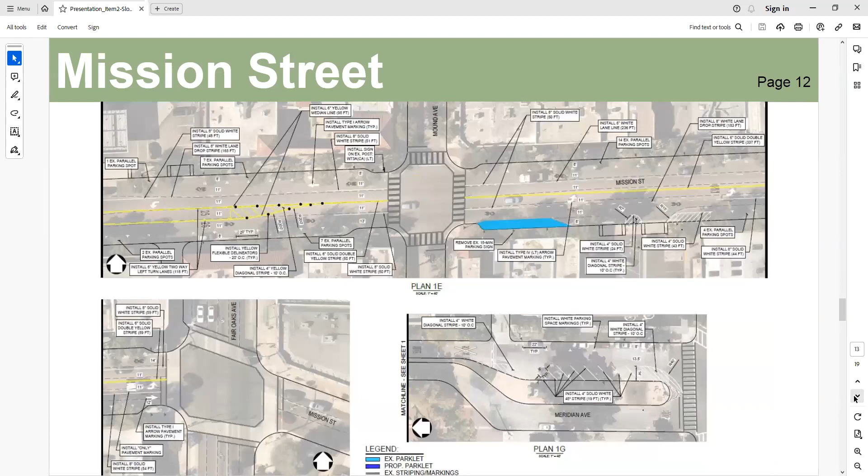Okay, we can shoot to the last page. Hopefully it's simple because there's not much on there. Let's go to page 12. So this is the termination of the setup on Mission Street. And at the bottom there, we have the little section of Meridian where parking has been added instead of the wide northbound lane on Meridian. Any comments on that?

Can you explain the parking on Meridian Avenue? Looks like your diagonals are backwards, unless you wanted back-in parking. Yeah, I think that was an error. I think it's probably the orientation of the drawing that caused that, but thank you for adding that. Are there spaces there now? There are spaces there, yeah, parallel spaces. So it's just increasing the parking.

Got it, basically. But the one thing I'd like to point out is if you are westbound on Mission and you're east of the intersection, there's only one through lane. And as you proceed westbound to the other side of the intersection, there's suddenly two lanes. So you could stripe one westbound lane west of Fair Oaks and not have to drop a lane, because there's only one lane feeding it. So there's one westbound lane feeding the far side of the intersection - you don't have to create two lanes only to have to drop it. You just keep it one lane. That'd be a way of reducing.

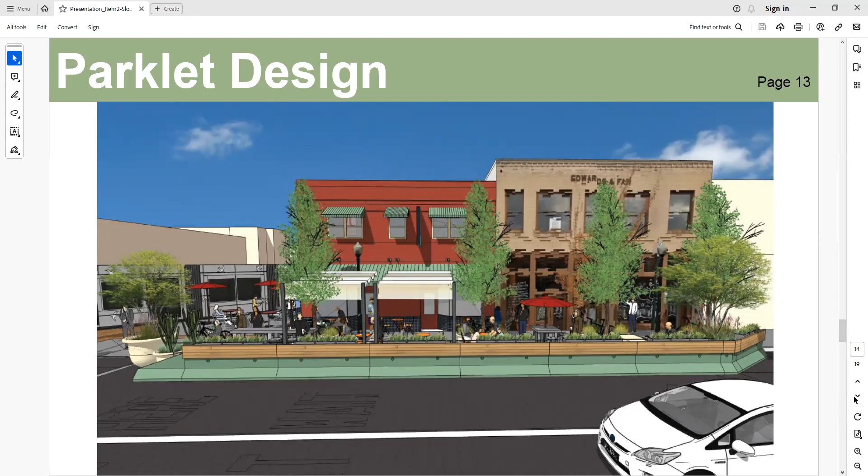If you jump to the next slide, you can see it on the angle there, and that's where we would utilize some of the planters outside of the K-rails on the leading edge of the traffic. The K-rail planters don't have any functional use, they're completely decorative. If you go to the next slide, you can see on the leading edge there's planters that can be inside the K-rails.

Because this leading edge basically creates a triangular gap inside the parklet with the flooring, since all the flooring we've purchased is rectangular, the design consultant, one of the sub-consultants of Alta, the Arroyo Group, was proposing that we install some sort of planters inside that area to take up the space so people won't step off into that area.

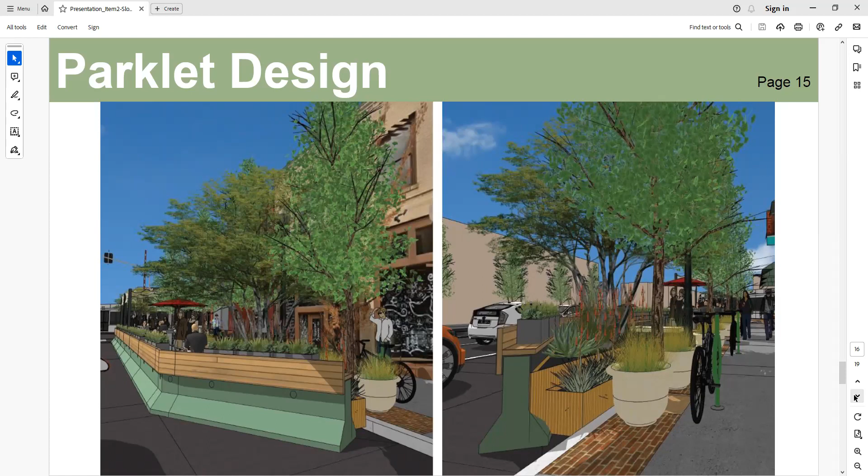Go to the next slide. I think you might be able to see. Yeah, this is a zoom in of one of the potential tops to the K-rails. In the last picture we had planter boxes, but this one is just a fabricated wood facade on top. You'd see there's railings inside the K-rail along the parklet, so that keeps people from stepping into that small gap between the parklet flooring and the K-rail.

Generally, the parklet flooring is continuous, has a railing around it, and inside that is the business owner's space. We would provide guidelines as to what they can do with it and the type and style of furniture they can use. But outside of that, the K-rails, the K-rail facade, the parklet flooring, the railings, and the planters would be the city's installation and responsibility. There might be one more.

Nope, that's it. So the K-rails, are we purchasing those or are they rented? The ones we have are rented. It would probably make economical sense to purchase these next round.

So next step, with regard to the residential section, continuing the survey responses, reviewing them again at 3 months. This Thursday, discussing the parklet design with cultural heritage, working with the businesses on the parklet implementation, because that'll come first. We won't deploy the road diet and the parklet at the same time. We'll do the parklets now, which is what we're working on. Based on your comments tonight, we'll refine the Mission Street configuration and propose different modeling scenarios that we'll want to run. We may want to reconfigure it based on our discussion tonight, and then we'll be back here for the next step. Any other questions on slow streets?

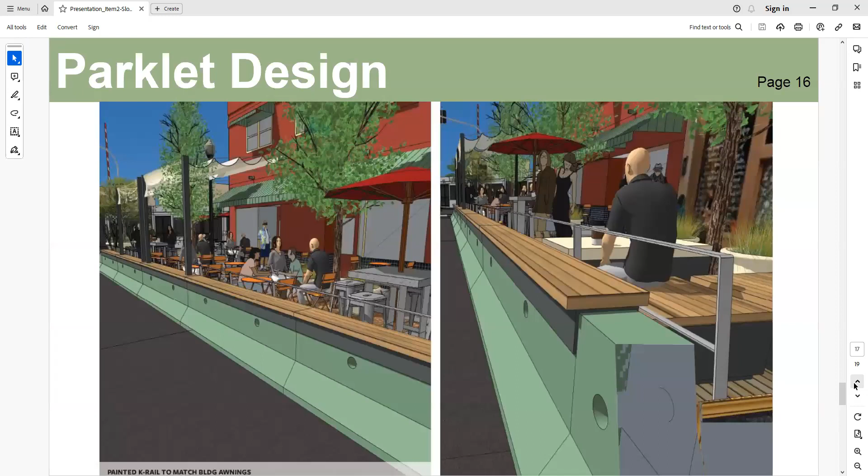Yeah, could we go back to one of the sketches? That's good. Just one suggestion: let's not have the large pot at the crosswalk, you won't be able to see a child should one run out. Sure. I'll just preface by saying that our consultant who did this rendering was not looking at the street space in any way. They were focusing on the building and the parklet, so it might not even be accurate where that's located.

Okay, but also I want to ask a question. You gave us a schedule like Commissioner Avison. I don't want to go round and round too many times. I'd like to suggest something that I think is feasible, and then the consultant has some direction if you would agree it is feasible.

That would be, let's simplify the operation. No development of lanes and then dropping of lanes, and suddenly you're in a trap left turn lane or a right turn lane. I suggest that from Fair Oaks to a point east of Orange Grove, the physical center 10 feet be used for left turn channelization, whether it's a conventional pocket, a two-way left turn lane, or something reserved for a median. The center 10 feet would be left turn channelization, continuous throughout the project. Next to that 10-foot strip on either side would be 10-foot through lanes, one eastbound, one westbound.

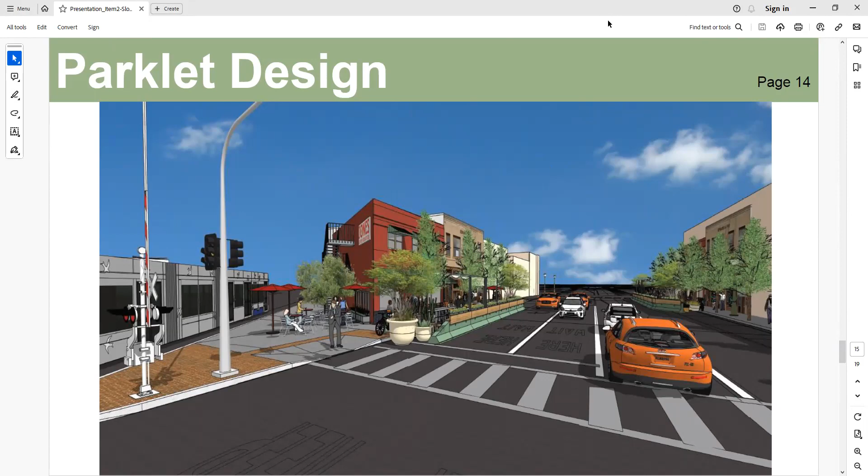I do want to make one comment. This is a routine item. We do have direction to change how we're handling minutes, and so all commissions are standardizing on a different action-based format. It was an email that the city manager's office sent out, so please take a look at it. The breadth of the minutes will be reduced to simply one-line items and action items.

Number one, not on the ones we're approving tonight, but starting next month. And number two, we've been given direction that discussion of alterations to the minutes should occur during the commission meeting, which would probably prevent us from circulating the minutes ahead of time. This is new, but I want to prepare the commission for that. Would it be appropriate for you to still circulate the minutes between two commission members?

We might be able to do that. Let me find out. Okay, I missed something, and it may be because of the hour. I understand the simplified format, makes perfect sense. I don't understand why they wouldn't be distributed ahead of time.

I think the idea is that if there's going to be a discussion about the change to the minutes, that discussion would have to happen in a public atmosphere. Oh, so they would still be part of the agenda packet? Right, it would just take it from offline to online. Got it. Basically, yeah, no problem.

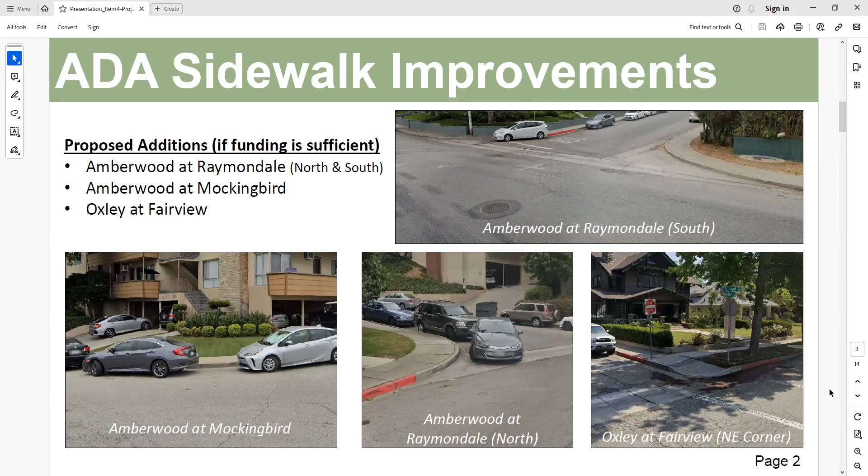Thanks, Ed. So the next couple of slides you've seen before—these are all repeats from our State of Streets meeting. I want to bring this up and shoot through them quickly since you're familiar with them. We wanted to give you the initial view, no discussion needed, of the areas we divided up for our future street program. We talked about dividing the city into sections, not for the current project sets, but for future project sets. So this is the 2020 pavement condition index.

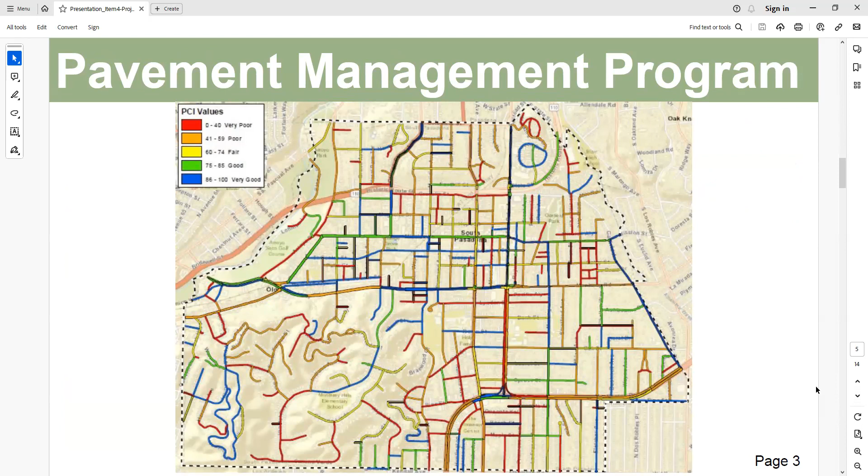You've seen this before—you can jump to the next one, Liana. During our State of Streets, we talked about funding levels, how much you're going to put in each year. Jump to the next one, Liana—sorry, I'm going to jump quickly. We talked about all the elements that go into planning your street construction: considering utility improvements, arterial versus residential, and what funding you have.

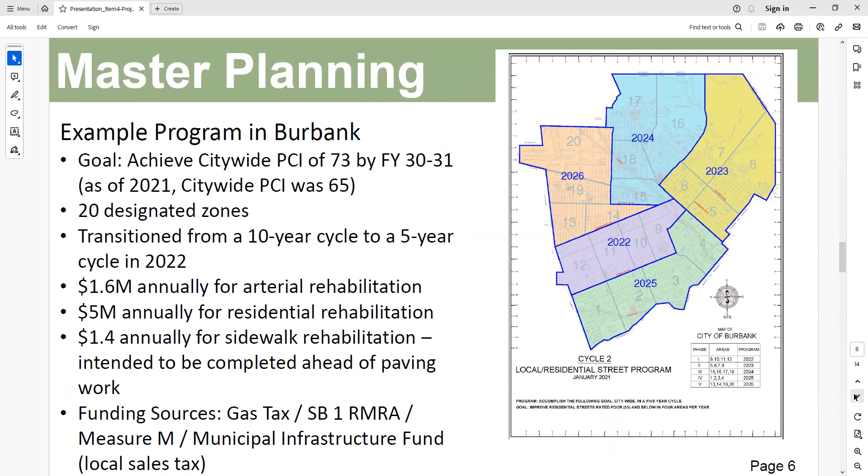Development projects, things like that. Let's jump to the next one. This was Burbank's plan, if you recall from our session a few months ago. Let's go to the next slide. We still have sewer repairs. Next slide is water repairs and fire repairs. Let's go to the next slide.

Okay, so here we are. So this is two things. There was a request from the commission. Let's actually jump one more slide, let's just jump past this. It's almost the same, but it adds in some more lines.

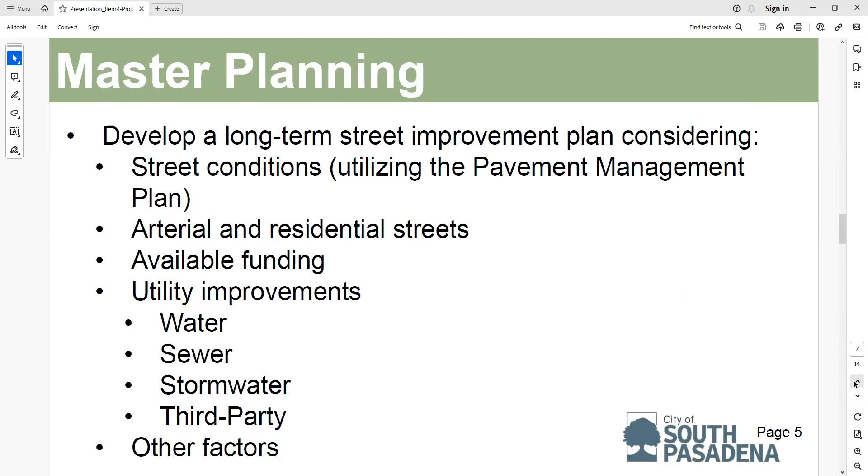Yeah, so this is under the 2020 plan. This is like, if you're gonna spend 3.5 million a year, or 3 million a year, or 2.3 million a year, this is how long it takes. But this doesn't include utility replacements that are required, water, sewer. It's a good model, but there's a lot of other factors to consider. It doesn't really consider concrete work.

Ted, do you plan on bringing this back to the commission? Absolutely, yeah. This is just an initial preview for you to take a look at. So please take a look at the map and come up with your questions. We'll revisit this. Okay.

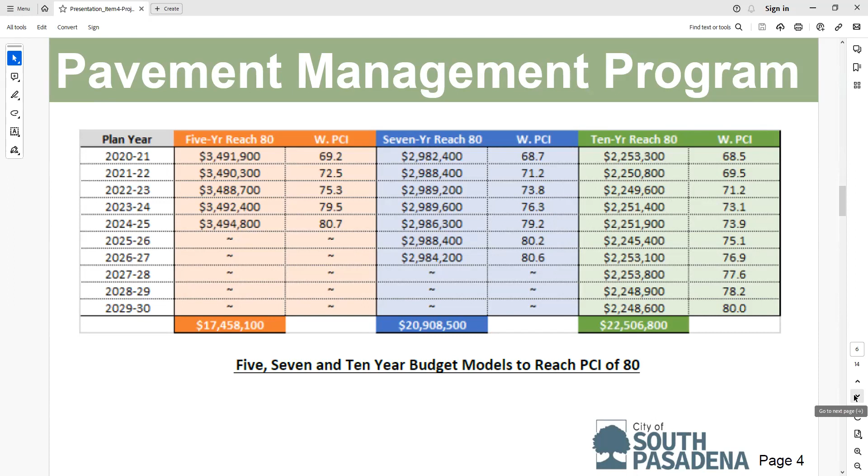I think that's it. All right, so any question on the project status?

Just a quick question about the zones. There hasn't been any decision on what zones are going first or any. Not only that, there hasn't been any decision about whether we should even have zones. So yeah, it's very preliminary. Okay, got it, thank you.

We're only a month away, basically. Do we know how we're setting up, what we're doing, what we're offering? When are we really going to start publicizing? It's only like a month away.

It's been well publicized. We have over 2,000 runners that will attend that event. There's a lot of information out there. It's mostly planned out, traffic control pretty much set. A lot of publicization. We'll be at city council next week to finalize the agreement with San Gabriel Valley Council of Governments. We have a plan for what the street will look like, a stage and fun zones for kids and all sorts of stuff. But I can share more materials on that if you'd like.

The last question, I know it was listed here, and I know the city council approved the second crossing guard going forward. I know this commission had come up with some suggestions of other safety mitigations. So the question is, do we need a time frame so that as we go into the next fiscal budget, these things can be budgeted, planned, and brought up for discussion, so we don't end up with no time, having budgeted, just doing the same thing. So that we properly plan now, because there were some things that we looked at, and I don't want them to get lost and fall through the cracks. I want the council to have enough time and opportunity to look at some of those alternatives, or if we say we're going to budget for this going forward.